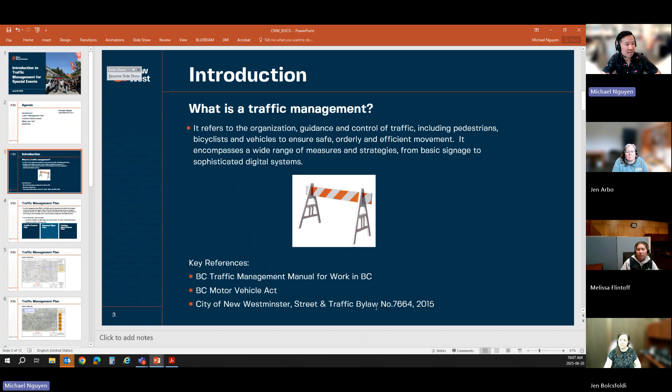Key references in this presentation that I refer to, and that would be helpful to know, are based on the BC Traffic Management Manual for Work in BC, the BC Motor Vehicle Act, and then City of New Westminster's Street and Traffic Bylaws, number 7664, edition 2015. Okay, and I promise that'll be the driest portion of this presentation.

Going further, traffic management plan is a detailed, specific document that details the strategies used for protecting event guests while safely and efficiently moving road users through or around the closure area. So TMPs are event specific and they're tailored to the unique requirements of each situation, and they often include traffic control, incident management, and implementation.

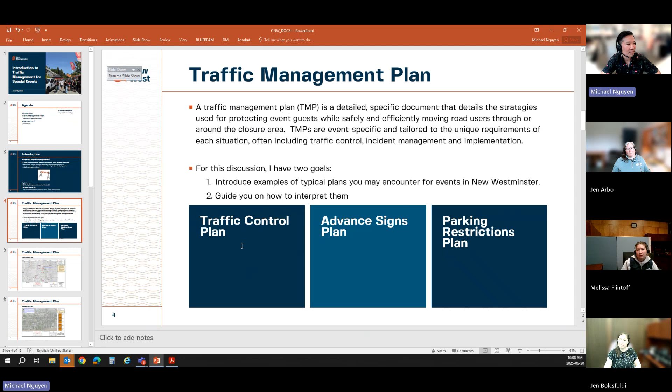However, again, for today, this discussion, I'm going to focus on the traffic control, and I'm going to have basically two goals for today's presentation. I'd like to introduce examples of typical plans that you may encounter for events in New Westminster, and I'm going to guide you on how to interpret them. And essentially, the three plans are a traffic control plan, an advance sign plan, and a parking restriction plan.

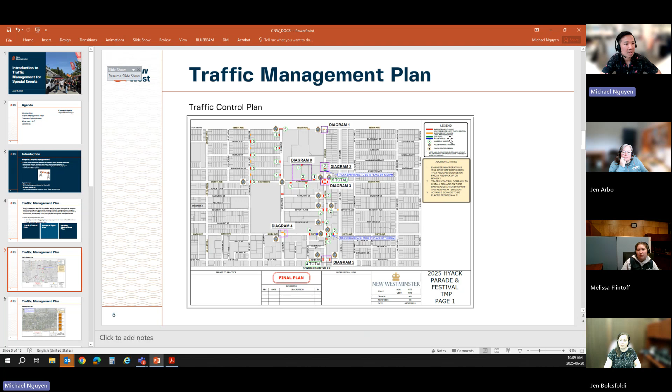So the traffic control plan may look something like this. To the right, there's typically a legend, and the legend is your friend. It will guide you on the symbology, the types of barricades, for example, the types of vehicles that may be deployed. I'm not sure if you can see it here. It might be kind of hard to see, but there's police vehicles, city trucks, red for barricades.

It symbolizes also the number of barricades to be deployed at a certain area, whether it's a police member stationing or a traffic control person stationing the closure. And then under that, there's typically some notes that we'll include that are implementation type notes. So they give instructions on who does what.

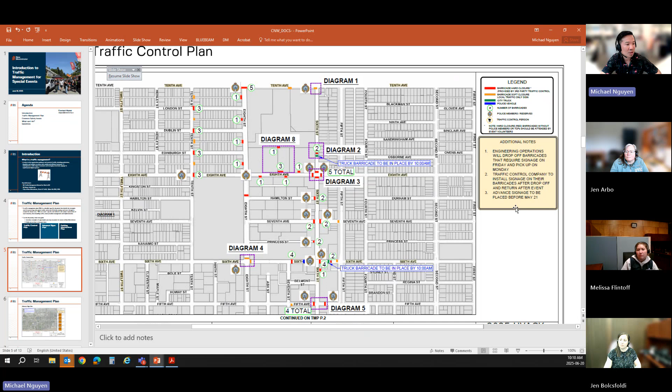For example, engineering operations to drop off barricades, a traffic control company to install the signage before and after the event. So it's quite specific to a task at hand there, and that's typically the intent of a note. So as you can see here, we have examples of where a barricade may be deployed.

We have the number of barricades deployed at a certain area, and we have locations where you can find police or traffic control personnel deployed. And there may be also specific instructions like a truck barricade to be placed here by 10 a.m., shown with the green symbol there. So it should be very straightforward.

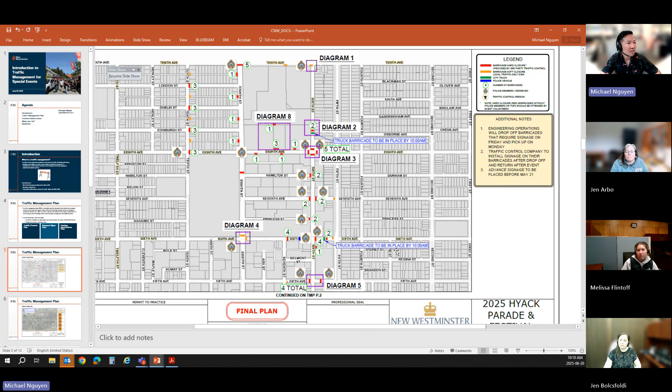A traffic management plan, again, the intent is for the safe movement of people and goods. So it should indicate where a road closure is, where traffic control personnel or police may be found, and it serves as a reference for all parties there, whether it's police, event organizers, the public. So the intent is for it to be easily readable by anyone if you just follow the legend.

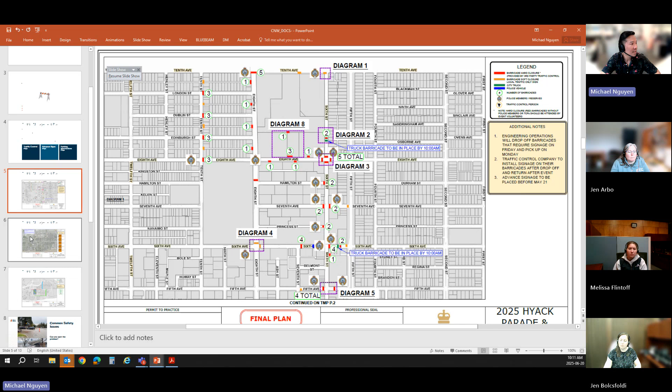Okay, moving on. The next example that you might see is an advance sign plan. And you'll typically be able to tell an advance sign plan by seeing some orange signs, which is orange static signs are what we typically place around the city in advance of road closures for a special event. And they're marked by basically a character, a letter, to symbolize the relationship between the sign.

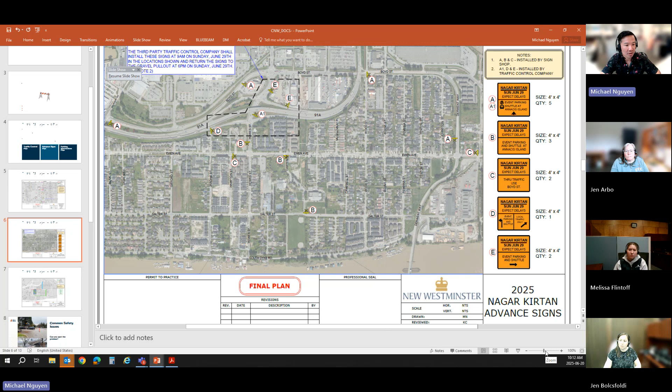There's a specific sign, the size and the quantity, and then the map will indicate where it is placed in the city there. It also shows the directional face. So I'm not sure if you can see it here, but I'll get in a little bit of zoom so you can see that the face of the sign, the flat side, will face the direction of traffic. So this is facing eastbound, this is facing southbound, and so on.

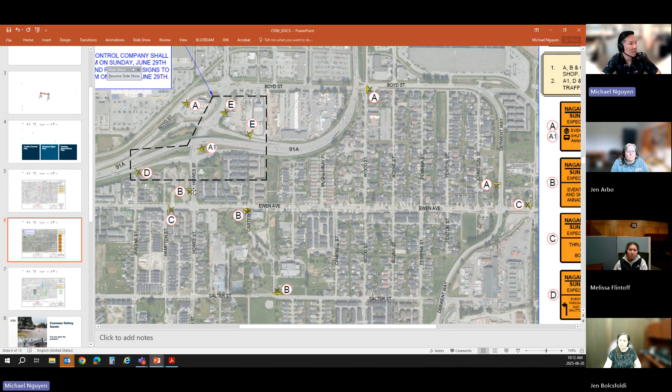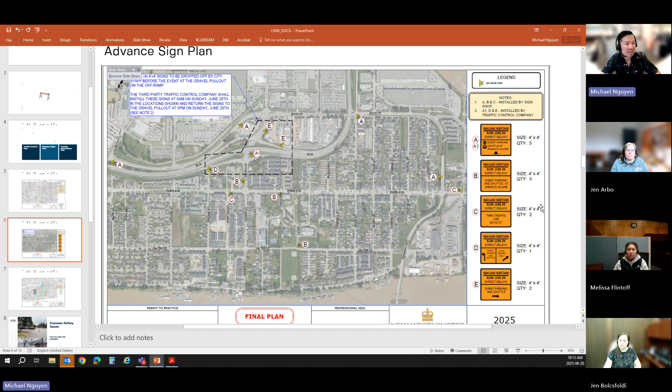Yeah, so with advance signs, again, with notes, they indicate implementation. So the responsibility for our sign shop to install certain lettered signs, and then third-party signs to be installed by the traffic control company here, indicated by, again, A1 and the letters, so forth. So again, the intent is for it to be easy to understand and implemented by the appropriate persons.

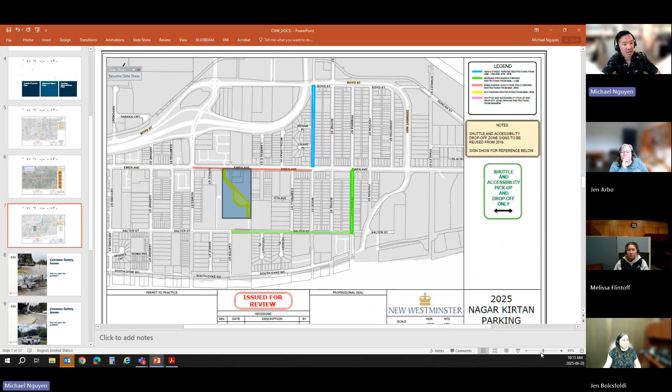And then the last sign that you may see for special events is typically a parking restriction sign. Parking restrictions are just that. They help guide our sign crews to install the proper signage. They indicate the period that the signs would be in effect for, and then these signs are typically placed 24 to 48 hours in advance of an event to allow residents sufficient time to move their vehicles prior to the event.

They may also include special conditions such as a special shuttle or accessibility pickup drop-off area, which we've shown here. It's indicated in the pink, shuttle and accessibility. It's shown on the map here, and then a typical sign is shown here for reference.

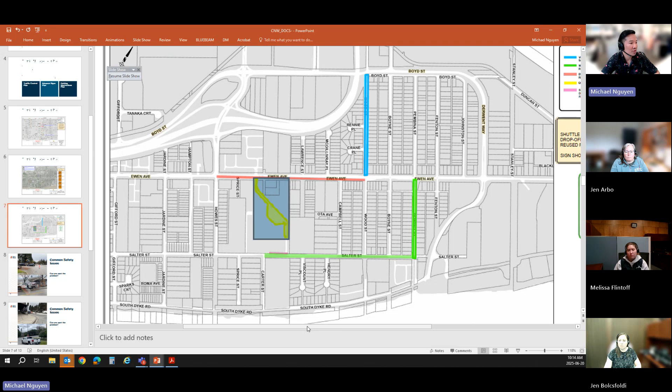Yeah, so with these parking restriction signs and the traffic control signs and the advance signs, they constitute essentially the core of what a typical traffic management plan for a special event would look like here in the City of New Westminster. There may be other drawings that also help communicate to the public. These signs are not shown here, but sometimes they can accompany these three core signs.

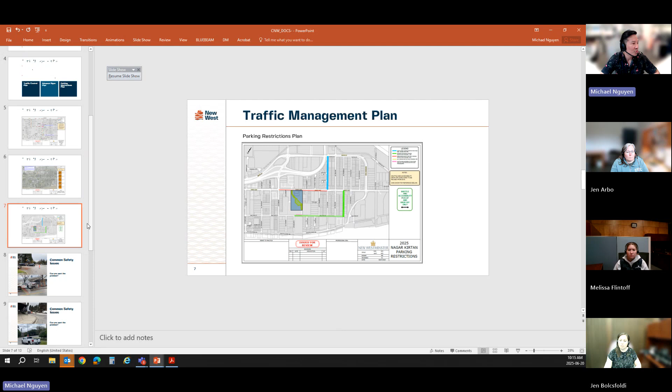I'm just going to move on from traffic control plans to some common safety issues that you may encounter. So now that you've seen what some of our traffic control plans look like, I'd like to show some typical examples of some situations that we run into when setting up traffic control.

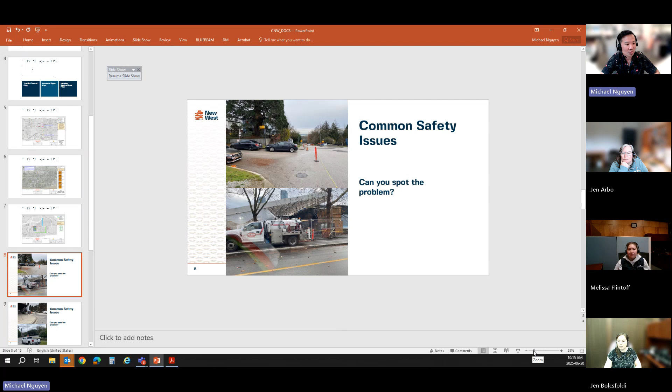And some of these situations are the reasons why we have traffic control plans, because without them, they can lead to a lot of dangerous safety issues, which we want to avoid, and that's why the work is put into a traffic management plan, to avoid these situations, so that the general public, motorist vehicles can all get to where they need to go safely and also still have an event safely. So with that in mind, I'm just going to show some examples and discuss the potential issue here.

The first one here, if you can see, is a vehicle parked in a no parking area. There's no parking signs over here. It's blocking a crosswalk, so pedestrians would have to go around this vehicle. So fairly obvious there.

The second example here is a vehicle basically stopping and parking on one of our sidewalks, or in this case here, the Agnes Greenway, which is a multi-use path. So we do not permit any vehicles to park on city assets like sidewalks and boulevards. They cause damage to the city's infrastructure, so we would never typically allow this.

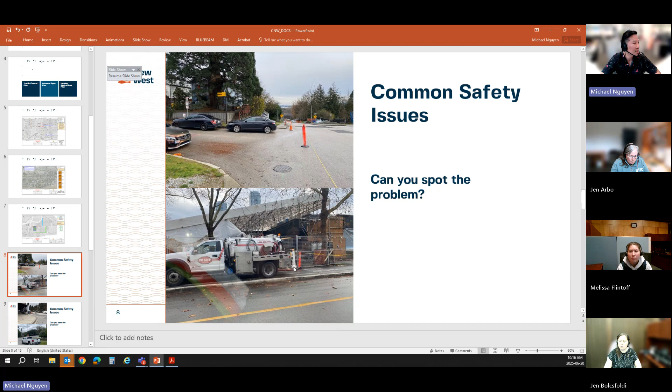This is a good example here, these two pictures of sightline issues. So the first picture here is a vehicle that's parked a little too close to the intersection. So when a vehicle is coming out of the intersection, it's going to have a hard time seeing around this vehicle. So we want to avoid something like this, where a vehicle parks fairly close to the intersection.

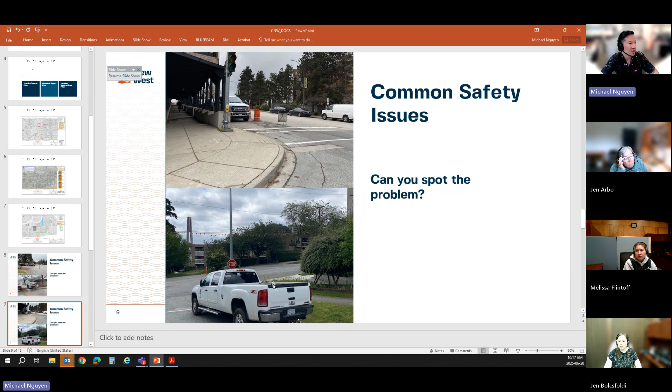Down below, fairly obviously again, this truck is parked right up to the stop sign and stop bars. So you could imagine if a pedestrian was walking across here, they would be completely blocked by this vehicle. So if a car was coming to the stop sign, a driver may not have the ability to see a pedestrian approaching due to this parked vehicle. So we always want to ensure vehicles are staying away from the intersection.

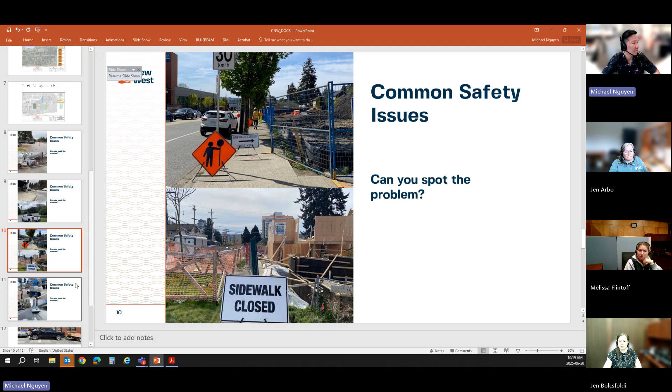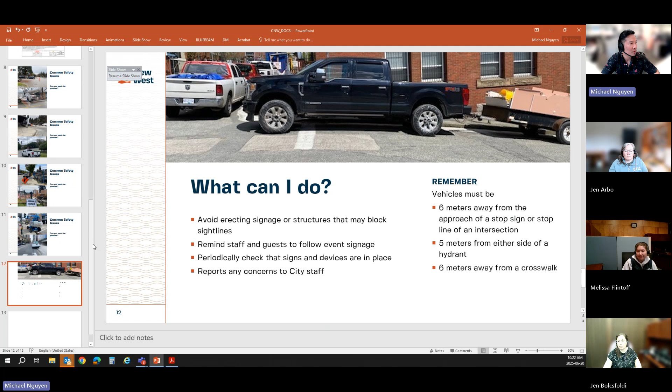So just remember, vehicles must be 6 meters away from the approach of a stop sign or the stop line of an intersection. Vehicles should be 5 meters away from either side of a hydrant and 6 meters away from a crosswalk. And if everyone can do their part and just remember some of these really simple rules, that will go a long way with keeping everybody safe.

And yeah, that concludes my short introduction here to traffic management plans. I know I went through some things fairly quickly, but if you had any questions or would like me to elaborate, just please feel free to let me know.

Any questions? Thanks, Michael. I'll probably mention here, for those that might be viewing this recording later, that when the events office asks an event organizer to prepare a site map, part of why we're asking for that site map is so that you and your team are able to actually create the traffic management plan. So that's why we ask for things like what time will the road need to be closed, not necessarily what time your event is, but what time will the road need to be closed? What time will the road be able to be reopened, if it's a road closure.

And I think you don't have to be a professional engineer to host an event in the city, and that's why the city has folks in our transportation department to do this work. But that's why we ask for such specifics, and sometimes we come back repeatedly and ask, can you clarify this? How many feet do you need? How many parking spaces will you be taking because of all these signs and barricades that might be required? So I really appreciate you showing the output, the end drawing, the thing that all the professionals need in order to keep an event safe. That's why we're asking for really specific site maps.

Even if it's not a road closure, there's still pedestrian access. A good example is Tipperary Park. It is a parking lot, so that's technically a road. So it's important, even if you're doing an event in what you think is a parking lot and it should be really easy, there still is an impact to traffic management that has to be managed. So just wanted to mention that for the purposes of this recording.